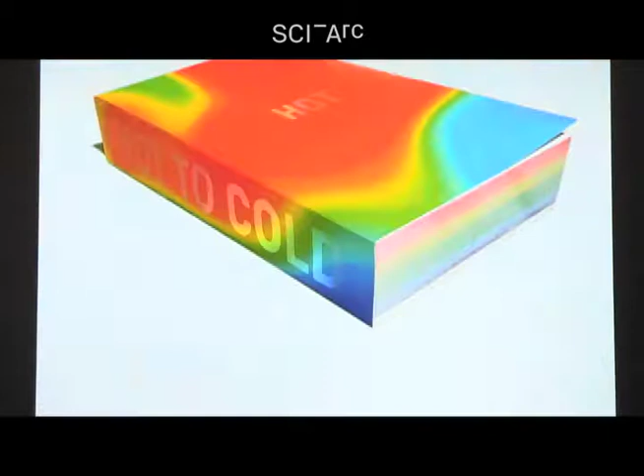So here are offices. We have offices, of course, in New York, Copenhagen, and most recently in London. Bjarke has his back to us. He moves around, so we all sort of move around from desk to desk with our laptops and get together around different projects. But I wanted to talk about Hot to Cold because it was both an exhibition and a book.

Hennessey + Ingalls is actually right across the street. I just popped over there.

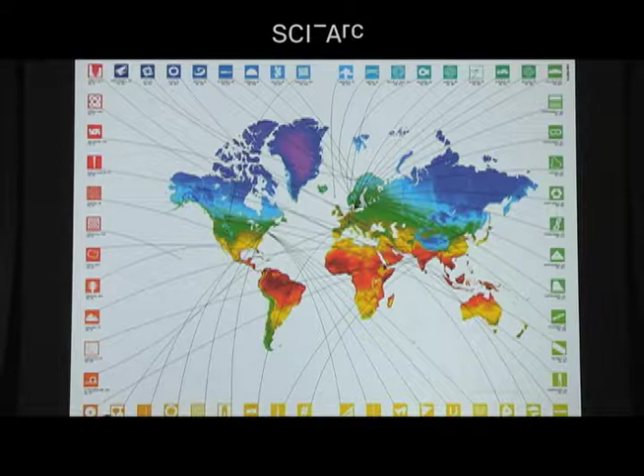The journey we take and the way the book is organized is traveling from the hottest regions we work in to the coldest. We're currently working in about 25 different countries, with construction projects in 12 of those. It's interesting to consider how climate and site impacts actually drive our work. Here you sort of see the extremities.

In the 1930s, there was the famous exhibition at MoMA, The International Style, co-curated by Philip Johnson. This was a celebration of modernism where you could build basically the same looking building, a very efficient tower in any country, and through machines—humidifiers, air conditioning, heating—make anything habitable. It was also basically saying that man, in a way, was able to subvert nature.

The same institution had another exhibition called Architecture Without Architects. Here Rudofsky, the curator, was talking about vernacular architecture, architecture driven by its site. So an igloo in Greenland looks, behaves, and performs differently because it's trying to retain heat. The city of Sana'a in Yemen looks the way it does and has chimneys for a wind chimney effect, bringing cool air from the streets through the buildings to cool the city.

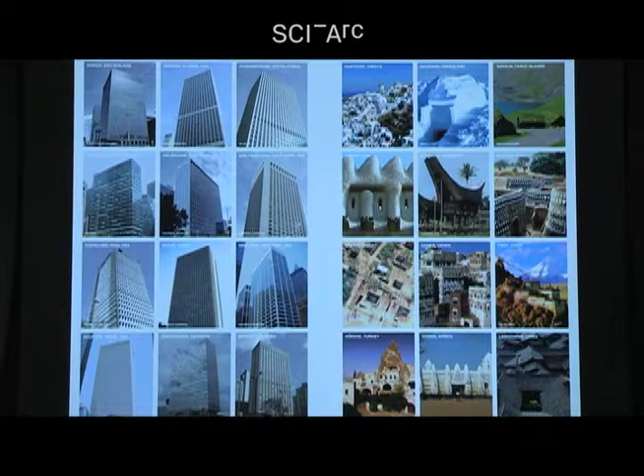So we at BIG see ourselves really in the center between these two—we take the efficiencies and structural logic of the International Style, modernism, but we also think very much about the site specificity and sensitivity needed in vernacular architecture. We call this engineering without engines: the possibility of reimagining being in buildings that are not driven by machines, but are thinking about their sites, about wind angles and roses, and where daylight comes from, so you can work with the forces instead of against them.

So let's start. You can always look at the frame of the projects to see where they're located, from hot to cold. We're going to start with our residential project, Coconut Grove, just outside downtown Miami.

This is influenced by the South Beach Art Deco style, where you have these extended eyebrows over the windows that passively protect against the high noon sun. So we've cantilevered all the terraces and made wraparound balconies, again to create this very local aesthetic that also performs as shading.

These are two towers that may look like they're adjacent and next to each other, but actually the site is very narrow, with a front tower and a back tower. Historically in this area, when you've built these two towers, the front tower has always had more value or sold at a higher price than the back tower.

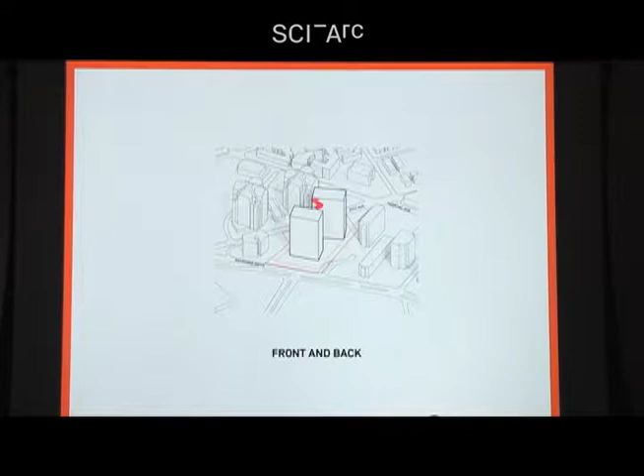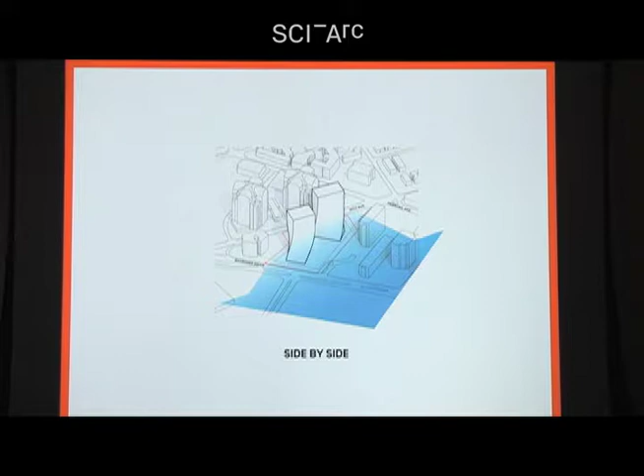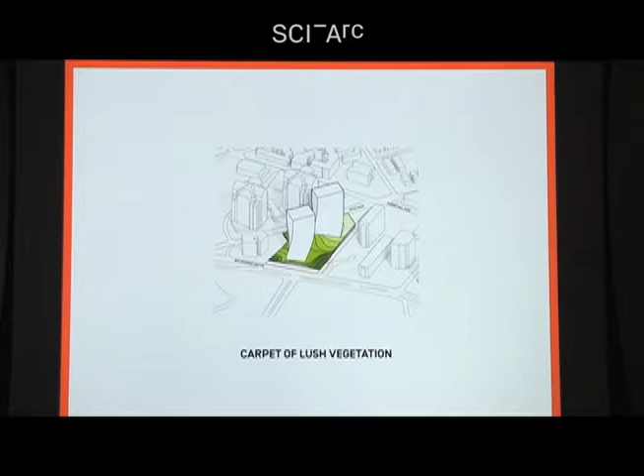What we were looking for was how to design these two towers—how can we manipulate them to make them appear more side by side, more like siblings or sisters, twins, rather than older and younger? How can we think about the views out, and how can we create a shared ground level that ties the entire complex together, as well as one of generosity?

Here we're looking at how to open up and slide the glass doors so you basically have a complete interconnection between outside and inside.

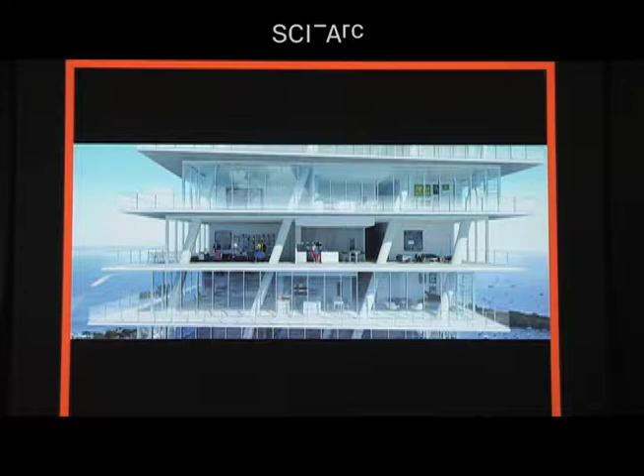These sloping columns are what basically allow you to have that quality of being side by side. The sloping columns are, of course, always different on every floor, so they also become family members. It's not like a column you'd traditionally see straight up, straight down, where it becomes white noise and you lose it. This column is something special—something you can call a member of your family.

Then you have the ground level, a lush landscape that holds everything together. The question again is, is something like this actually possible? I'm really happy to say they've literally topped out. The first folks are starting to move in, and the completion date is December, next month. So we're really looking forward to having our first example of what we call tropical modernism here in the United States.

We're going to stay in a tropical climate. This is in Taiwan on the eastern coast, Hualien. This is a community, a master plan for folks who are basically retiring. Their families are downsizing, their kids have moved out of the home. They need perhaps some assistance, so there's a hospital included, assisted living, as well as really reinforcing active lifestyles. So it's a community that we see as kind of a mini ecosystem.

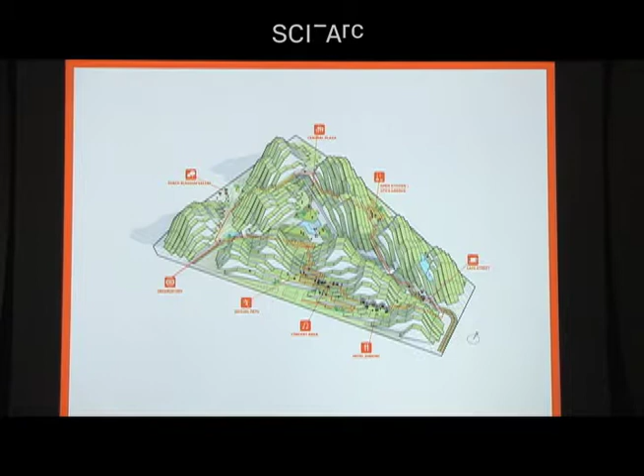We're interested in retaining all of the rainwater on the site, and in creating microclimates based on evaporative cooling. When you look at these structures, you may think they look very unique, not necessarily following any kind of logic, but literally all of them are based on a grid. The grid also has a double-loaded corridor. We're looking for the width so that you have daylight coming in from both sides, with very little space too deep to have natural daylight.

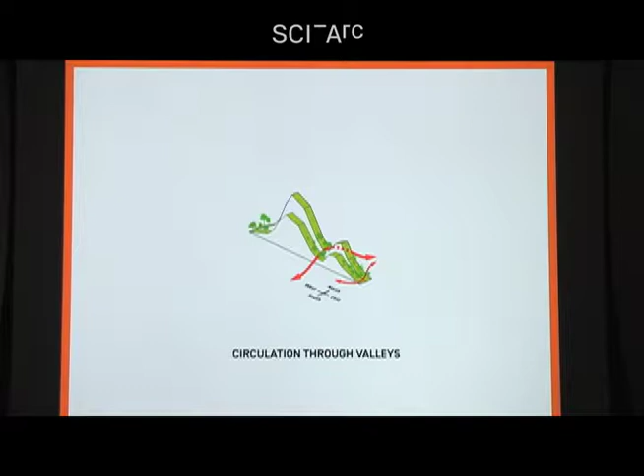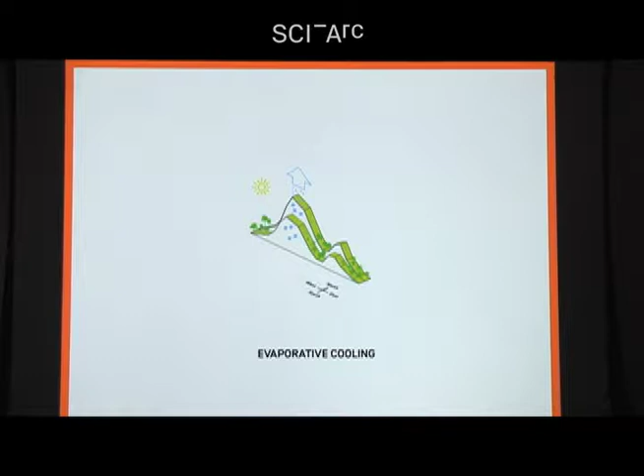We're looking at the travel of the sun, the views both in and out, and this idea that you can retain the rainwater in the green roofs and then, through evaporation, cool the climate by 1 to 2 degrees Celsius just within the site.

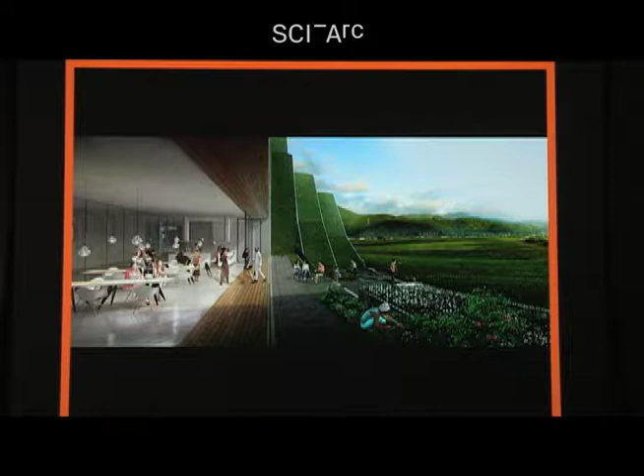The living spaces are somewhat smaller than typical, but we've made the communal spaces larger and more generous. Here's one of those spaces where you move in and meet your neighbors. Again, the same idea of sliding glass doors that open up the inside to the exterior. We include a lot of running paths and active spaces.

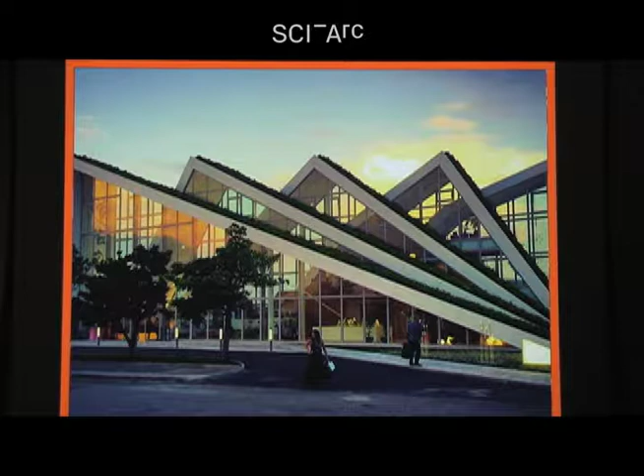There's also a running path in the basement, so if it's raining, they can still be active. The rainwater is collected on the green roofs and hard surfaces in a retention pond. The question always is: is something like this buildable? Here is the first community center that's now built, a testing ground for exactly how the green roofs will interact. Phase 1 construction is starting next spring.

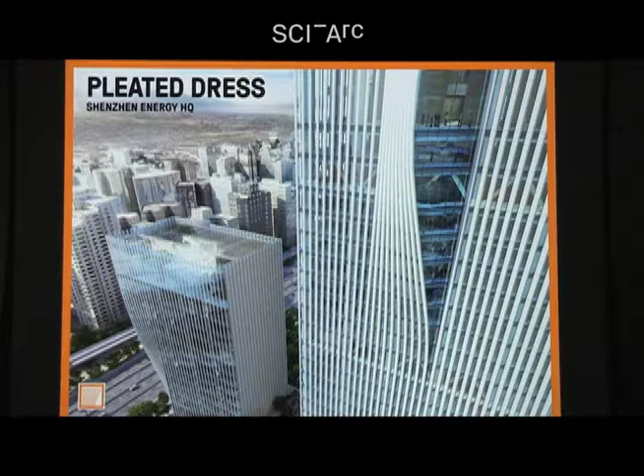In Shenzhen, we are designing Shenzhen's natural gas headquarters. What I really have to admire about the Chinese is that they've come to a realization they cannot build energy plants fast enough for all the people moving into the cities. In America, energy companies are literally looked at as: the more energy they produce, the more energy we consume, the better for their shareholders. So there is no desire to actually save or think about the resource or where energy is coming from, just the production and selling.

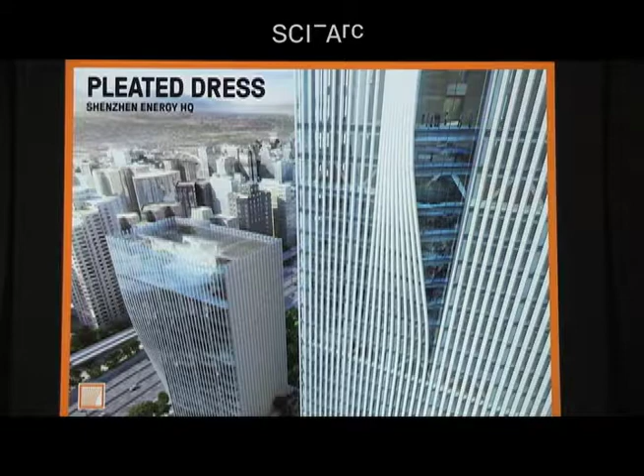Here, the Chinese have said we have to reduce usage because we can no longer meet the demand. So through their tender for this high-rise, the winner was going to be selected as whoever could reduce their energy bill by 30%, and you had to prove it through calculations. We decided to look at this as: the biggest issue here is cooling. It's a very tropical environment. It's a 200-meter tall tower and a 100-meter tall tower, right on the main thoroughfare next to the convention center. What we ended up looking at was just the facade.

Thinking about when heat hits a glass curtain wall, the glass curtain wall is heating up, and if the sun actually goes into the building, the heat is already there. No matter if you have a curtain or roll-down protection, it's there. So really the way to start looking at it is how do you keep the heat or the sun's rays from entering the building at all.

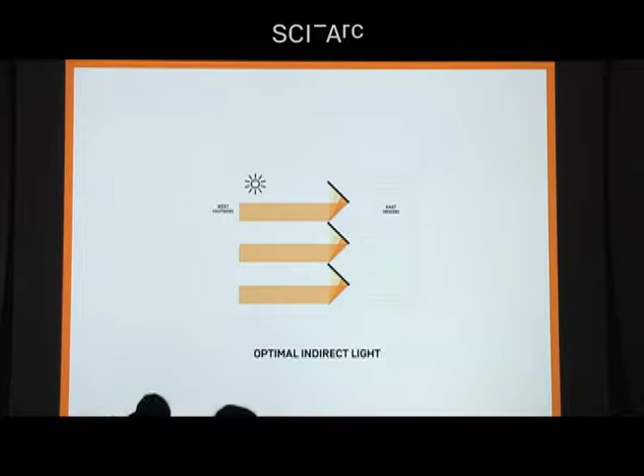So we looked at creating a serrated edge where, towards the south, the pieces would be opaque and solid, and towards the north, they would be glazed so you could see through them. When you're sitting in the office space looking out, you're going to see indirect light as you look toward the south against all of these veneered facade elements. And as you look north, it opens up the view to the city.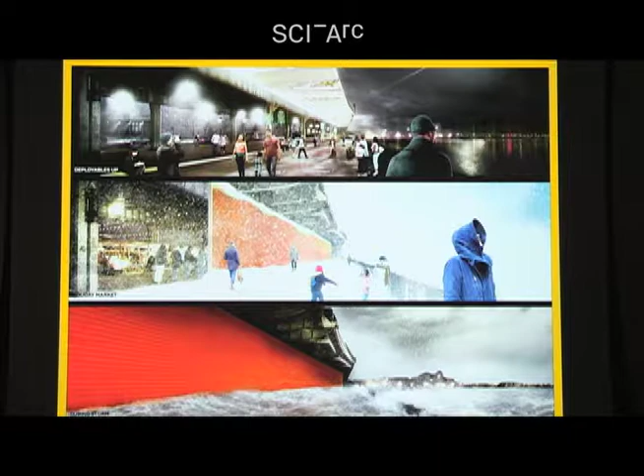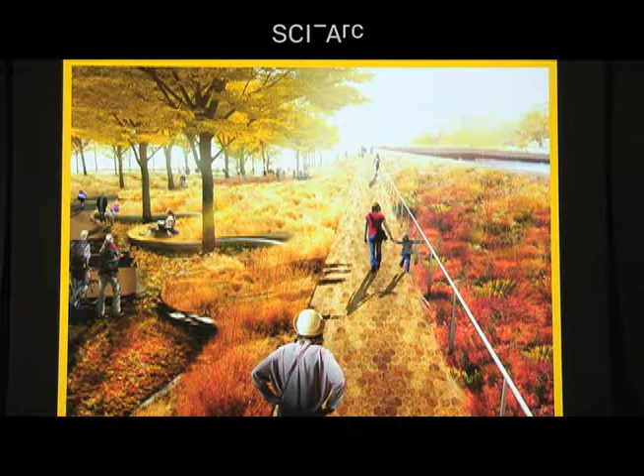What we're looking at here is kind of what it would look like—a little bit of Venice in New York, with the bike path. Here's a short film that explains it as well.

That was actually why Sandy was so bad, because of the phase of the moon. It was already a very large high tide, as well as the storm surge coming in with the wind and the tide lining up perfectly to give us 14-foot tides instead of 8.

The most shocking part of Hurricane Sandy was the fact that it exceeded expectations. I think the sheer magnitude of it caught a lot of people off guard. When Hurricane Sandy came, we were not prepared at all—not even the slightest.

It was like an alien invasion of water, and not the good kind. It came right in front, where there were literally boats on 14th Street floating in front of our window. We had a sub-basement level office a block from here, and it was totally covered in water for 2 days, so we lost everything.

We're really concerned about another storm and the flooding that's possible, and we think next time it's going to come even further inland. I'd like to see some type of flood protection in this area. That's going to happen—we're vulnerable, obviously, being close to the water.

Something that just brings more walks, different walks of life, another escape from the busyness and hustle and bustle. There's this great space that could really become community space, cultural space, and active uses.

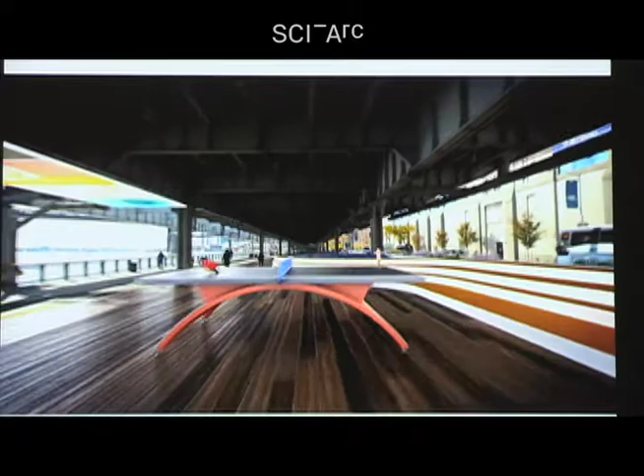Everyone enjoys space, and in New York and other congested cities, it's hard to come by.

Anything that makes the cities greener is such a wonderful thing, not only for the environment, but for the people who live in the city too, to be able to be around that space.

The plans, the berming, the sense of how it can become part of the natural landscape itself, and how we want to program that, is really the next challenge.

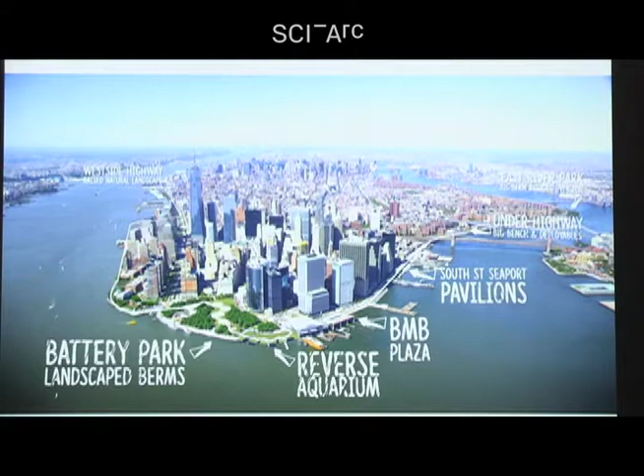We are the link, the tip in a sense of the big U. It's important that the entire waterfront of Lower Manhattan build in the plans that have been put forward, because we can not only fortify this great city of New York, but be a model for cities all over the world.

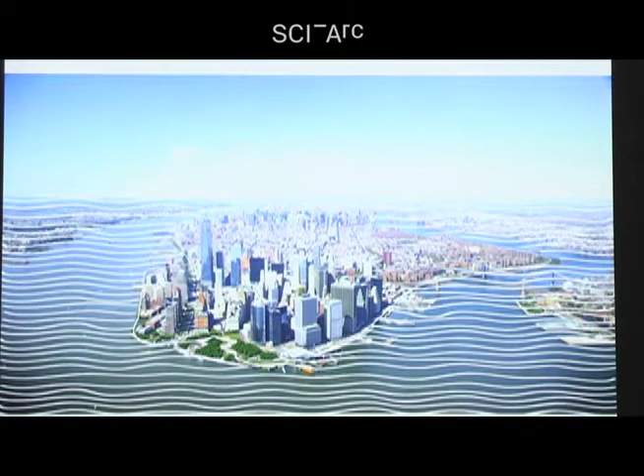I think you have right here with the LA River a very similar situation, where you have a river that likes to flood or can be quite dangerous when there's a lot of water. There's an effort to undo the past approach of putting it into a concrete channel and make it a little more natural again. Every city, whether coastal or with a river running through it, has issues of water, and our attitudes as designers to that water.

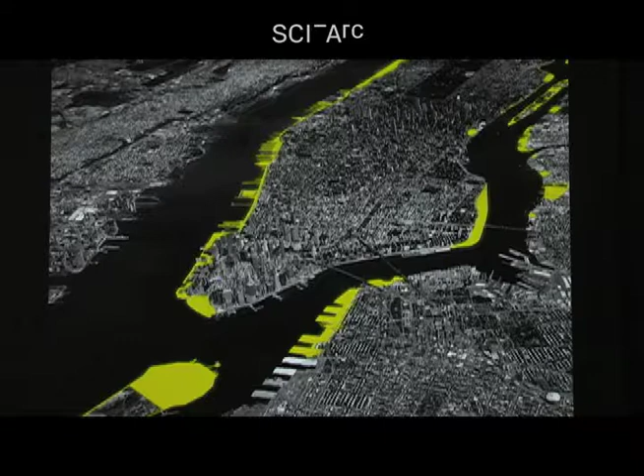When you look at how much investment the city of New York has put into reclaiming the piers, into creating a very wonderful soft edge to the waterfront, you can understand that when we were thinking of how to design in this area, we have a 1930s power plant to our north and a trash distribution center to our south.

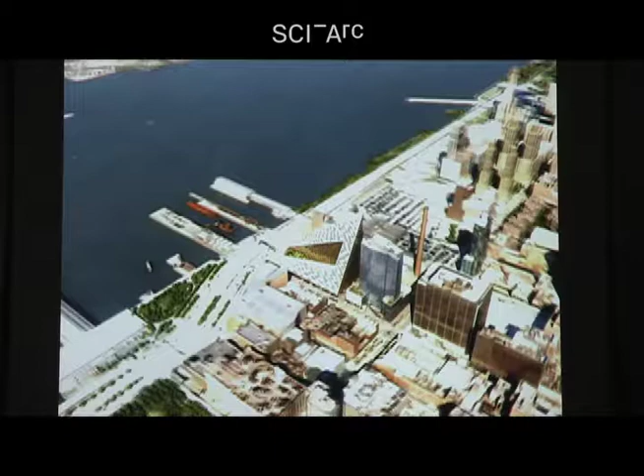So we thought that the courtyard, in this case of the whole city block, was a way to internalize the views, not to express a tower that looks out but rather create something very inward looking. We also saw it as a possibility for Hudson River Park and Riverside Park to hop over into the grid of Manhattan and start to green and create habitat within the city.

The Courtscraper came out of going through a series of iterative design, where we were looking at the program and requirements the client had set out for us, and within a 2-week process came into the ideas of this courtyard.

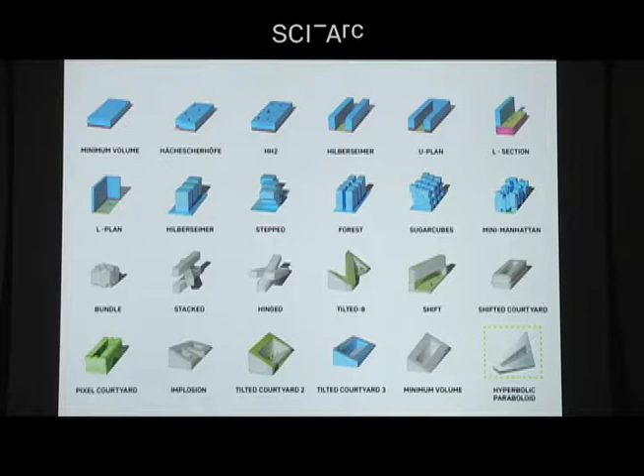We had initially made it a very mid-rise courtyard and picked up the corner on the water side. The client, Douglas Durst, came back and said, 'Give me my tower,' so we picked up the northeast corner, and through this collaborative effort came up with the Via as we know it today.

Now, courtyards are nothing new. They've been around forever, not only in Europe but also in New York. This is 1929, the London Terrace — a full city block, 1,800 apartments, 3,500 people living there, like a little small town. Inside is this beautiful, lush courtyard. You live in the middle of Chelsea, the middle of the city, and you have this kind of quality.

I don't need to speak about courtyards here — Melrose Place is from Los Angeles, so you know the virtues of courtyards and all of the courtyard typologies that were being built. But it's sad that in New York, with the coming of the Lever House and the Seagram Building, this typology of a tower on a podium wiped out the courtyard typology totally.

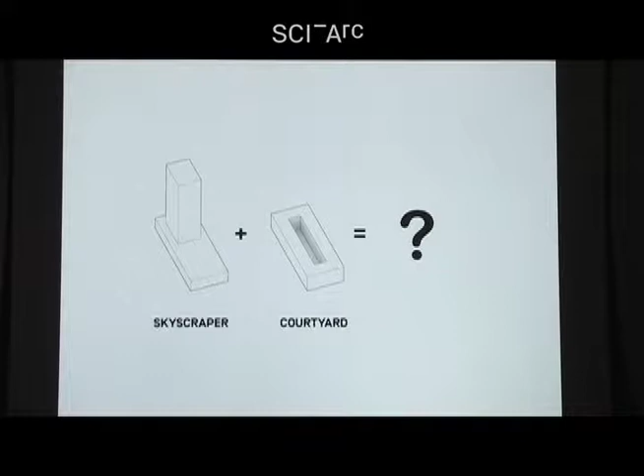These first towers were actually built as office towers, but then became residential towers, and many were sealed with very little connection to the outside. Our question was: what could happen when you combine the typical New York skyscraper with a typical European courtyard? It was really to create a new species of residential, the Courtscraper — the idea that you could create a dense building in the city and bring daylight into all spaces.

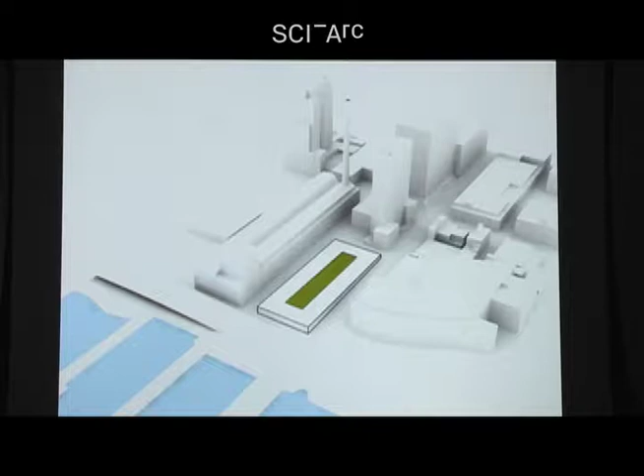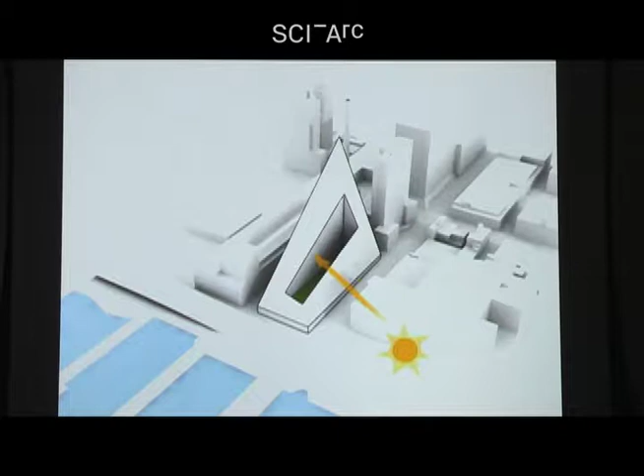What we have here, typically you have a courtyard that goes all the way to the ground. This was also important to protect the views of the building behind, since our client also owned that one. In our case, we take the courtyard from the ground and lift it to the second floor, creating a full podium, which is very important in New York. Then we lift the northeast corner 44 stories tall, still preserving the views of that tower.

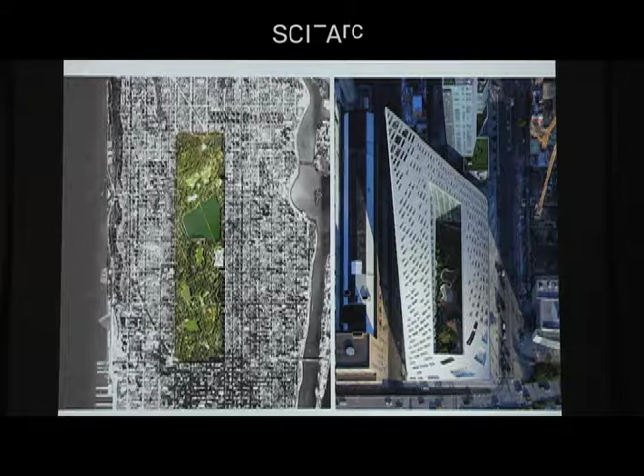The sun coming in from the south brings light into the greenery. For us, that illustrates how on a building scale, the courtyard is what Central Park is on the city scale. It's proportioned exactly 13,000 times smaller than Central Park. We also wanted to bring certain aspects of Central Park into the landscape design, recreating the meadow and the fountains. You don't have to be the tallest building on a skyline to have an impact. You can have the same density as the tall sliver towers, but in a way that offers a lot of diversity and spaces that are much higher quality.

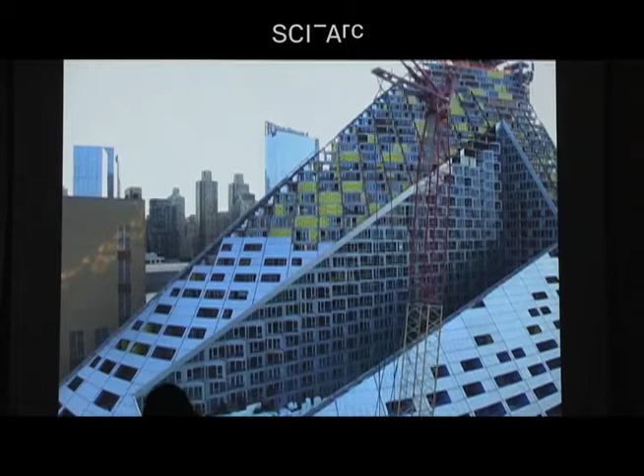The construction is concrete, as generally all residential towers are. It's panelized, with 1,200 unique mega panels set in. Enclos was the subcontractor for that, along with a lot of storefront systems. Something very unique to this building are these cockpits, as we call them, or terraces and balconies. You're living basically 37, 40 stories up in the air, and you have the ability to walk outside. You're protected from the wind on 3 sides, and you can enjoy the view.

When you walk into the lobby, this is the stair that takes you up to the courtyard. You have views from all of the different balconies, so every unit has a balcony or a terrace. When you actually inhabit the landscape, it's very lush. You have areas to sit down, there's a little fountain for kids, and as you walk up there's a grilling area to your right, and the little mini meadow.

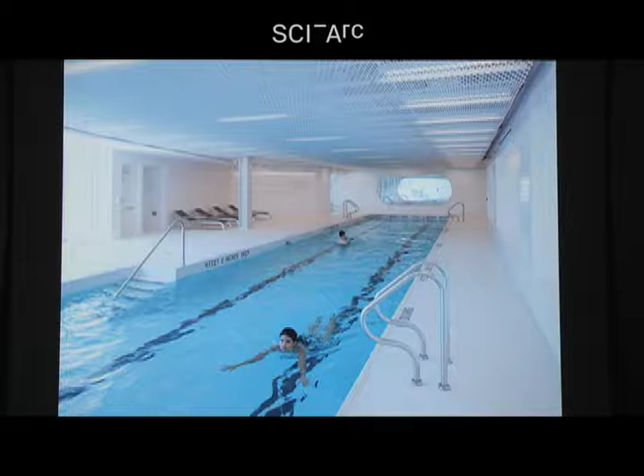For many, this is a rental building. So we have, you can play pool, swim in the pool, enjoy a half-court game of basketball, a poker room, a bridge room, and a library. There's a lot of different amenity spaces that have to be worked into these projects.

But I think the quality I really appreciate the most is the units themselves. This is one of the units that looks directly out onto the landscape. You're living in Hell's Kitchen next to a 1930s power plant, and your view is out to the landscape. So it's looking at how you can actually make something nice out of a tough situation.

The next project I'd like to show, or I'm going to let Bjarke actually present it, is the Vancouver House.

The Flatiron in downtown Manhattan is an architecture born out of a specific moment in New York real estate history, where skyrocketing land value intersected with the advent of steel structure and elevators, transforming a difficult triangular site into one of the most striking landmarks in New York, becoming the namesake for its entire neighborhood.

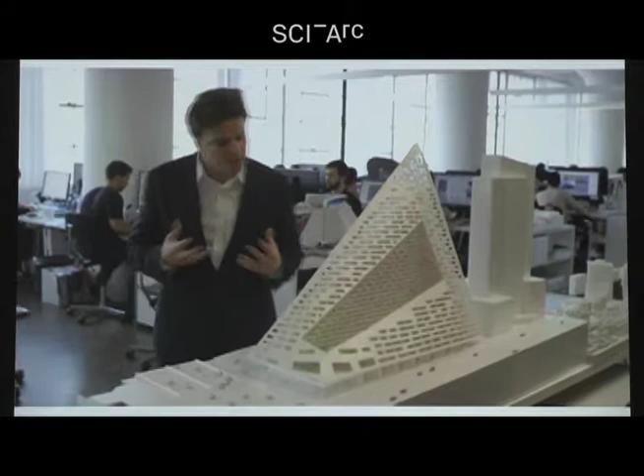For us at BIG, this is a perfect example of how we like to work. We like our designs to respond to their surroundings, to inherit their attributes from the challenges and potentials of their environments. Like, for instance, this Courtscraper in Manhattan that combines a courtyard with the density of a skyscraper, creating a warped pyramid on the waterfront of the city.

Essentially, our buildings end up looking different purely because they perform differently. Take, for instance, this financial center in Tianjin that inherits its stalagmite silhouette from the structural challenges of building taller than half a kilometer. Or this observation tower in Phoenix that allows visitors to experience a 3-dimensional 360-degree panorama of the surrounding city, almost like a heavenly body hovering above the desert.

And finally, that brings us to Vancouver. The first time I arrived in Vancouver, I drove across the Granville Bridge, and I was struck by the beauty of the urban panorama of the slender glass towers rising against a backdrop of the sea and the mountains.

Right here where Granville Bridge triforks, we've been invited to reimagine the gateway to the city. This is already a site in transformation. Granville Bridge is being transformed into a pedestrian parkway, almost like a Canadian cousin to the High Line in New York. And right where this new green promenade touches downtown, it's going to create a new urban oasis, which is going to become our new neighborhood.

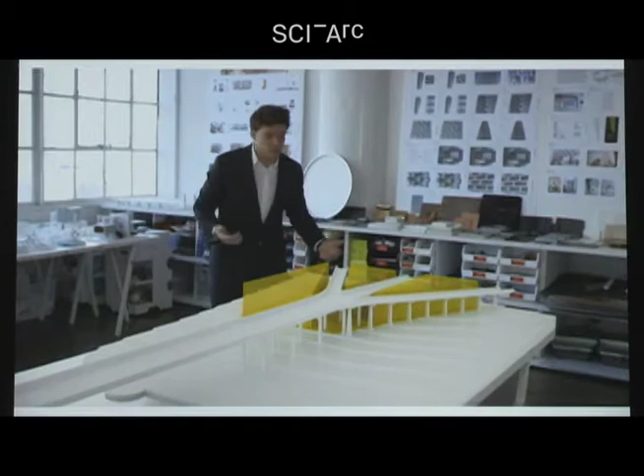So first of all, we thought, why don't we reimagine the traditional urban podium and turn it into a lively village full of alleyways and plazas for a dense, lively urban environment of restaurants and retail underneath a green carpet of grassy roofs and under the canopy of the bridges.

And for the tower, there's a general 30-meter setback requirement from all the bridges to ensure that nobody lives too close to the bridge, reducing our tower to this tall, slender triangle. But also to respect the neighboring park, we had to recede our silhouette to ensure they get daylight and sunshine, reducing our footprint to only 600 square meters.

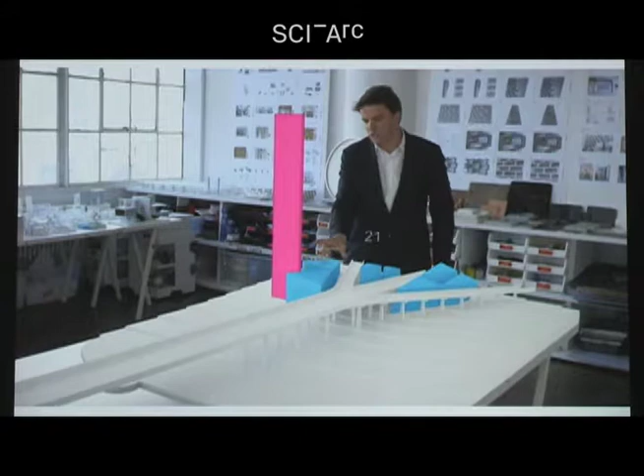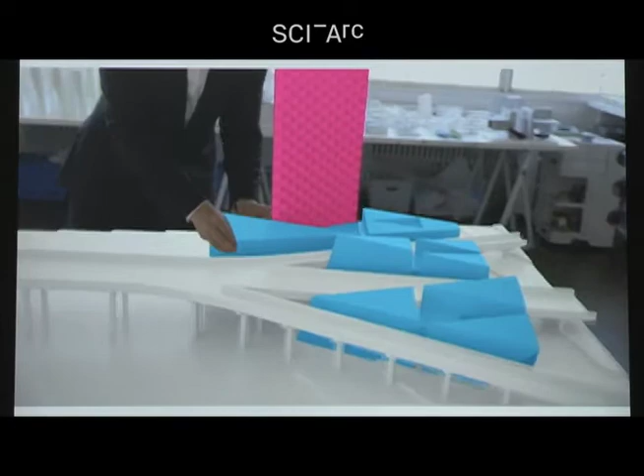But then we were thinking, if the 30-meter setback has to do with ensuring a minimum distance, as soon as we rise above and beyond the bridges, we can actually come back out and maximize the areas with the greatest views and the most abundant sunlight. So it almost becomes like this tower turned upside down that grows out of a tight spot in a lively city and then expands to occupy the maximum area in the surrounding skyline.

In a way, you can see Vancouver House as a contemporary Canadian evolution of the Flatiron that takes the residential high-rise one step further into the future.

Just as the Flatiron, in a way, is built because of technology that was happening. You had the advent of the elevator, and you had the advent of reinforced concrete construction and steel. What this allowed you to do was build more floors and have them accessible. If this was a 5 or 6 story building, it wouldn't really work, but as a 20-story building, it works.

And I think whenever there's these leapfrogs of technology within our profession, you have to look back at all the sites that were not really taken advantage of and see if those sites now suddenly make sense. That's what I think the Flatiron really represents, this kind of celebration of technology. And what the Flatiron is in New York, we hope is the Fat Iron in Vancouver.

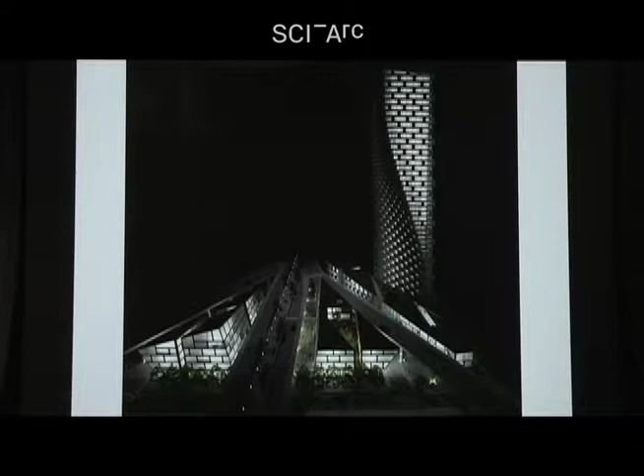So this is now under construction, with a completion date sort of in early '18. It's just now popping out of the ground.

You've probably noticed that we've gone through a lot of different shades. We're now in green. This is in Copenhagen, and this is an abandoned dry dock north of Copenhagen, that's now the Danish Maritime Museum. So you have a castle right here, which Shakespeare actually used as the home base for Hamlet, and it's a UNESCO World Heritage Site.

What that means is that you can almost have no new construction within eyesight of the UNESCO Heritage Site. The museum is in this dry dock, so we were really not allowed to even peep up out of the ground. So the tender we received was, okay, we would like to build a Danish Maritime Museum, so let's pump out this water, fill the hole with the program of the museum, and just cap it.

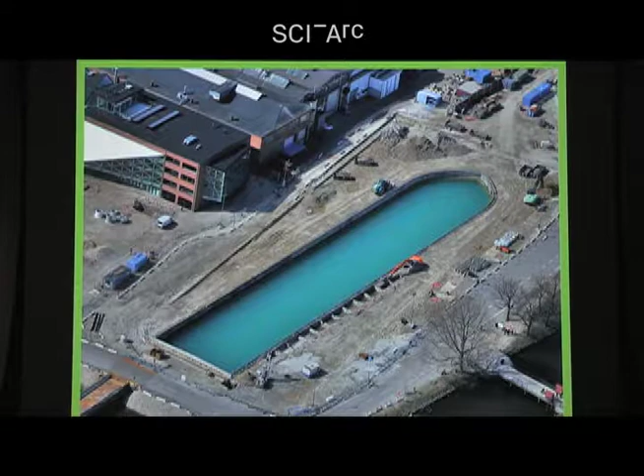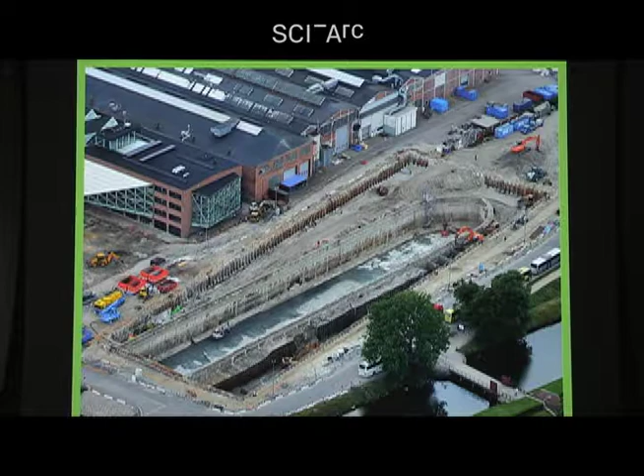And we thought that was a very sad way of reading it, because the best artifact of the entire shipbuilding industry was the dry dock itself. So we wanted to preserve the dry dock as a kind of fossil for the museum. And so what we came up with was this idea of digging out like a donut space around the dry dock, preserving the dry dock as it is, as a public space, then placing the program around it, and capping the area around it.

We were competing in this European competition, so we had 5 other competitors, and they sued the client after we were declared the winner, because they said that if the tender had told them to dig out around the dry dock, they would have done that too.

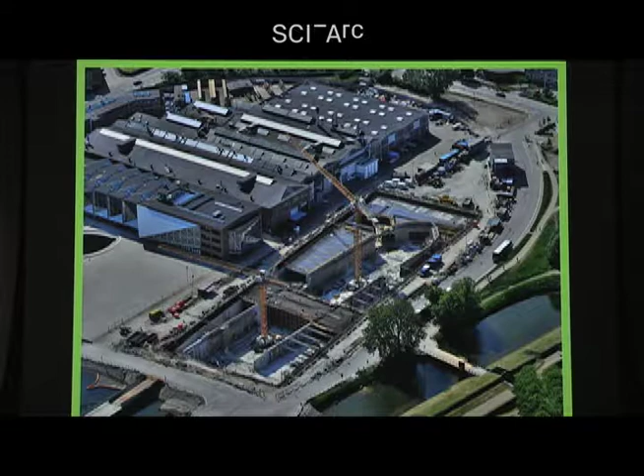So we were in a conundrum, because we basically had just won our first cultural commission, and the client decided to rip up the competition and say we're not going to declare anyone a winner, because they didn't want to get sued. We were devastated. But then two weeks later, the client walks into our office and says, I have a new idea. I'd like to do a new museum that you dig around the dry dock, and I think you guys are the perfect fit. So you sometimes really have to have clients that have the same kind of creative balls and cojones as you do.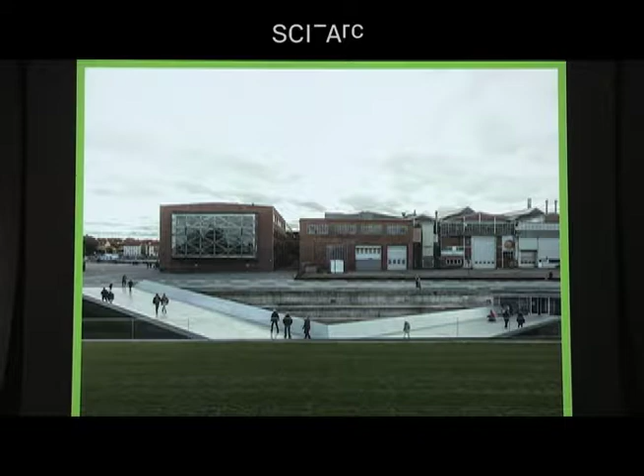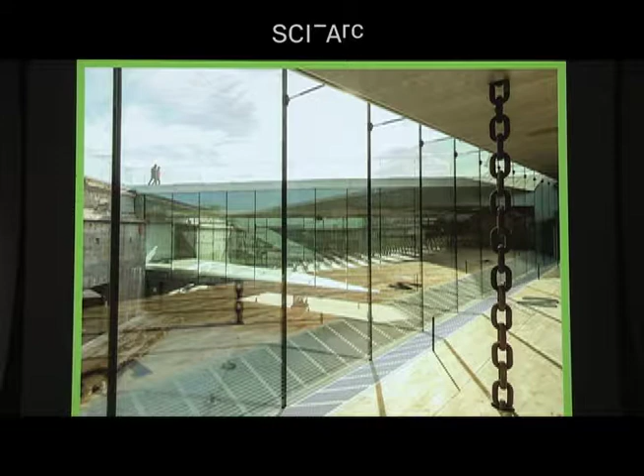So we worked very hard and long on this. This is about a 6 or 7 year process. Remember, I said it couldn't stick out of the ground at all, not even an elevator overrun. So the entrance is actually a gradual ramp that takes you down. Below these ramps are glass corridors that create short cuts between the different galleries. The entire dry dock is open 24/7 for all the folks in the city to inhabit. It's been a huge success, tripling attendance, with lots of people coming to see the exhibits and experience the spaces. We used chains and had these metal box trusses made in a shipyard, so there's a lot of tectonics in the building that reflect the way ships were built.

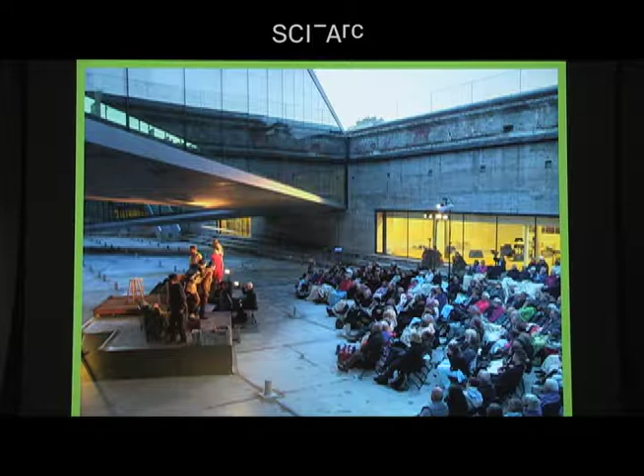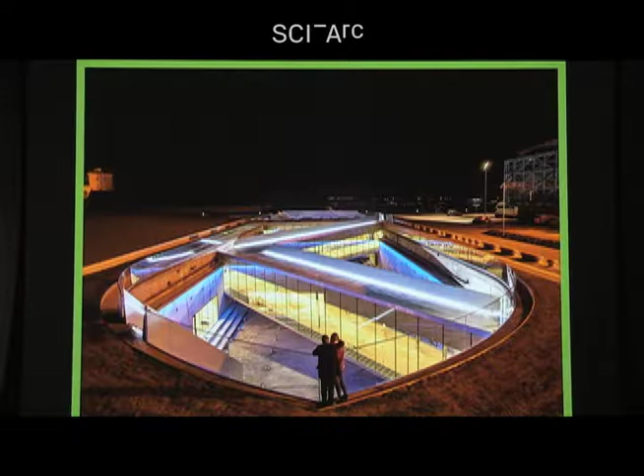We thought of a lot of spaces for the kids. We made a reading room at kid height, and the exhibition itself shows a lot of the history. The space down in the dock is used for performances and dances. Here it's like a little theater festival, or this reverse Titanic moment with Rose right here as you look down into the abyss.

Not everything has to be huge or big or new. You can really, like the last project, work with things that are there. This school and building is a perfect example of breathing new life into old abandoned structures, repurposing them. One of the smaller projects we've worked on involved Bjarke's math teacher, who became the principal of his high school and called and said, would you help us?

We need to build a handball court. Handball is the national sport of Denmark—that way they ensure themselves an Olympic medal because no one else plays it. It was a 1950s U-shaped school with a courtyard, and Bjarke remembers playing in that courtyard and thought it would be horrendous to fill it with a handball court—it would have destroyed the soul of the school. So he proposed digging the handball court into the ground.

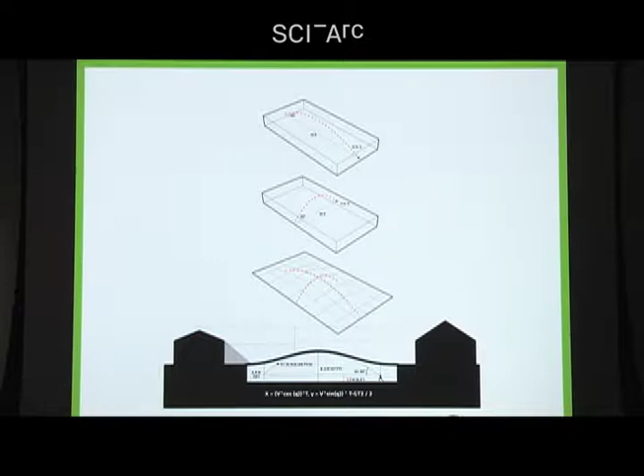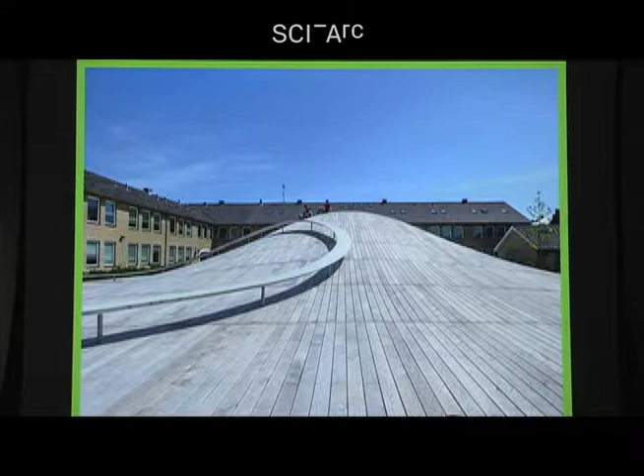As an ode to his math teacher, he made the roof the formula of the ballistic arc. You all know form follows function—this is form follows formula. So you have this shape that retains the ability to inhabit it all year round, and underneath it you have the court, with daylight streaming in on the sides.

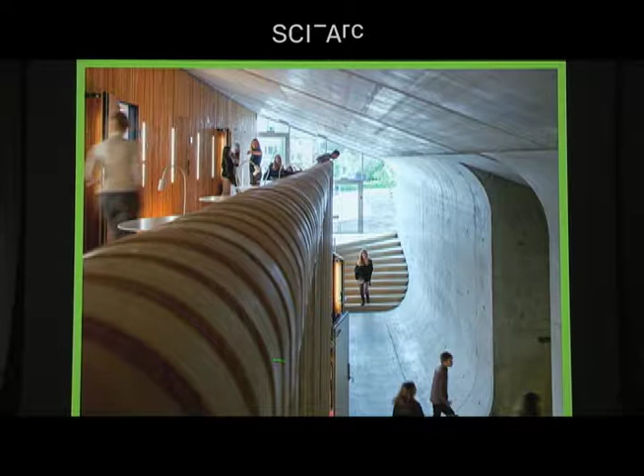The parents love it so much because during graduation they can actually see their child on the bump, so all the families are happy. It really is the place that everybody goes to. The janitor of the school says it's such a huge success—he can tell because there are now three times the trash bins in the courtyard than there were before.

We're basically designing the largest, most expensive building in the history of Denmark. Imagine the waste of 600,000 people going in, and the households of downtown Copenhagen getting their heat and electricity from it. It's in the center of the city because incinerators only make sense if trash trucks can drive there with relative ease. You wouldn't place these in the suburbs, like nuclear plants out in the countryside. So it's a power plant that needs to look good.

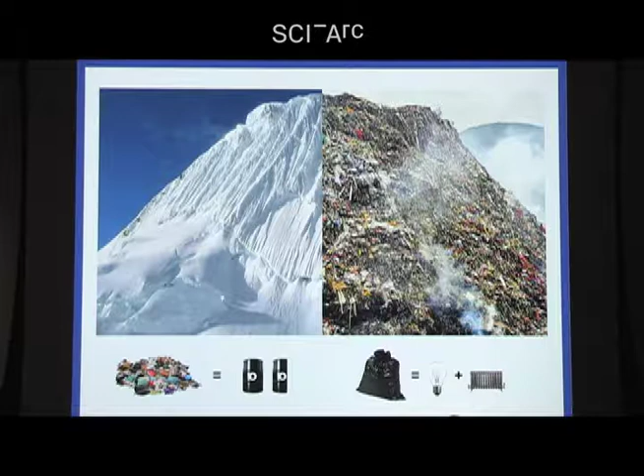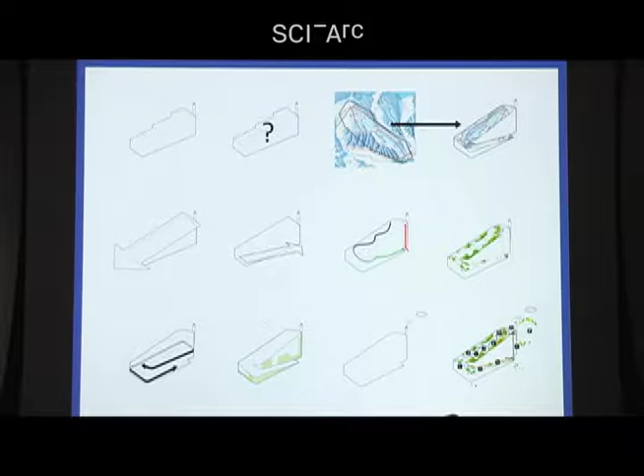Since we have this mountain of trash, and we're in the flattest country of Europe but have the climate of Scandinavia, it snows 3 to 4 months of the year. We decided to graft a ski slope on top of this power plant, with a black diamond slope, green and blue. It's a power plant that you basically use, an amenity for the rest of the city. It's a chance to take the hundreds of millions of dollars invested in our power infrastructure and turn NIMBYs, 'I don't want that in my backyard,' into YIMBYs: yes, my children want to play on that heap of trash.

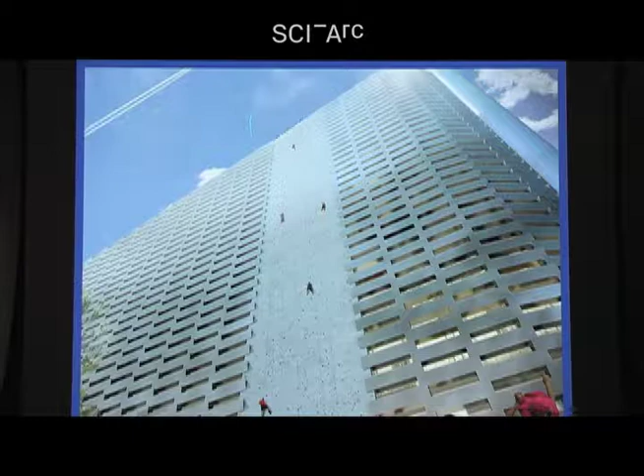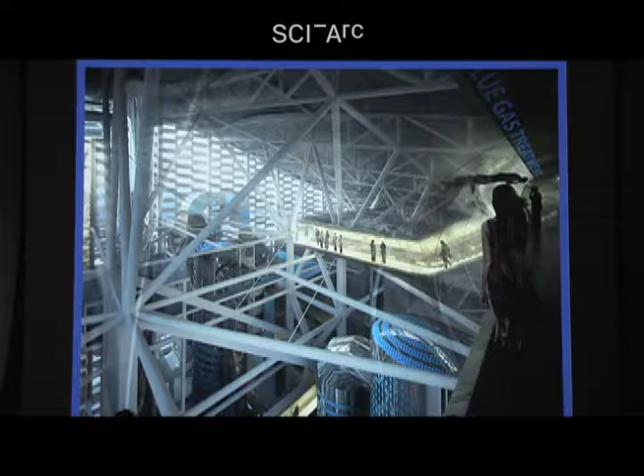It'll have the tallest climbing wall in the world. You can bring your kids to play and hike up, or even bring a date and look at all the spires and church towers of the city. Inside, we'll have super graphics that detail how the incineration actually happens, so it communicates everything. You'll walk through a Willy Wonka-esque tour, able to follow the entire process and become that much wiser.

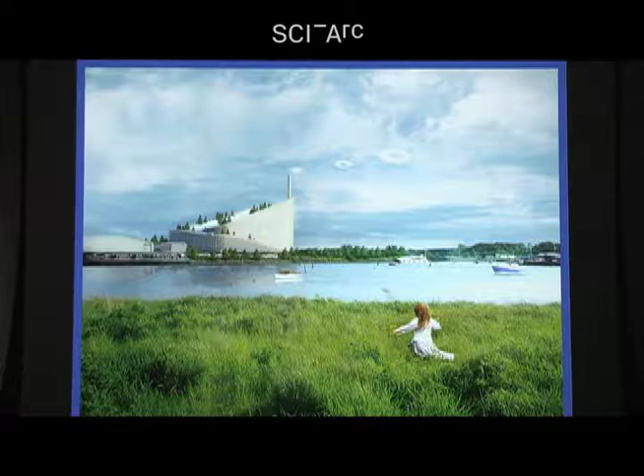It's a competition we won back in 2011, and it's now being built, now being realized. Here, this is something we're doing: we've decided not to just puff out a trail of smoke, but to puff out smoke rings. The smoke rings are there to communicate - each smoke ring represents when one ton of carbon is burned in the plant.

Think of us as social animals - we exist, and we literally do what we're told. When you hear the clock strike 3 in a city square, you know it's 3 o'clock; if that clock didn't strike, you wouldn't know what time it was. With a trail of smoke, you have no relationship to that smoke or its contents, no information. So with the smoke rings, we're hoping to create a communicative tool, to say to your daughter, 'look dear, 3 tons of carbon have just been burned in the plant.' And if it's suddenly 10 rings of carbon, maybe we should reduce our carbon footprint. Then you can engage and start to impact the actual thing.

But as an architect, you can't just go out and buy a smoke ring or steam ring generator - it's a big ask. So we've developed, over the last couple of years, a group within BIG called Big Ideas: architects, scientists, rocket engineers who are there to figure out how to do these things we ask of them on some of our projects. This is a prototype we did a couple of years ago; we've done two more since, actually creating a smoke ring.

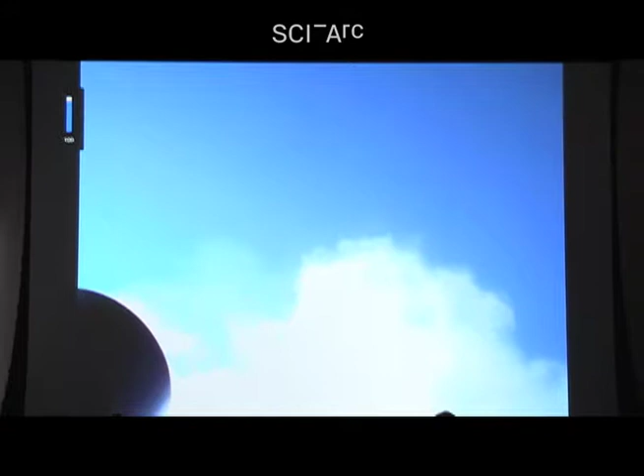So this is just to say, that's the optimistic message I want to end on: make your dreams come true. So thank you very, very much.